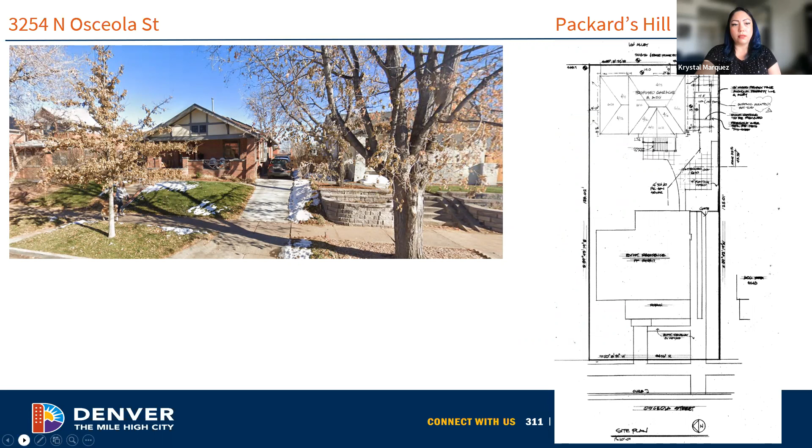Here we can see the proposed ADU garage in context next to adjacent structures. The new garage is still proposed at 24 feet tall, while the primary structure stands at approximately 19 feet 6 inches in height. The secondary structure is set back at the rear of the lot and is approximately 4 feet taller than the primary structure.

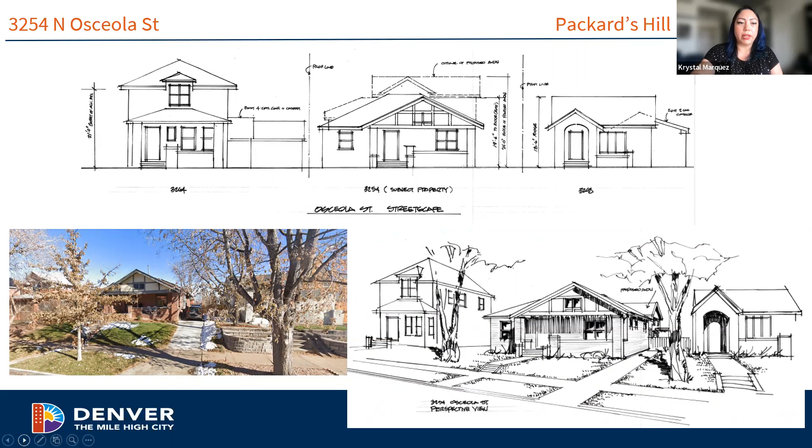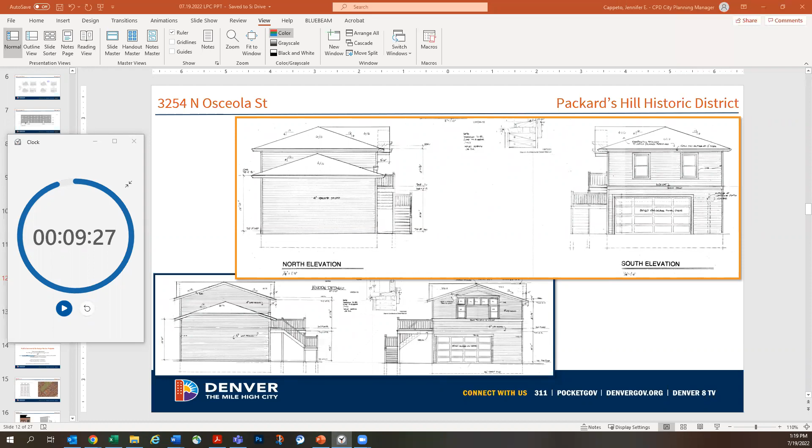Thank you. All right, commissioners, are there any questions for the applicants? No? Well, I think staff said it all then. No questions. All right, well, thank you for your time.

Thank you. Is there anyone on the line who would like to provide a comment on this project? Now's the time to do so. Please use the hand raise button at this time or dial star 9 if you're joining us by phone. I don't see any hands raised, and the person who was on the phone is no longer on the phone, so they must have been here for consent.

Gotcha, okay. If we don't have any public comments on this, we'll move into deliberation. All right, what did everybody think? We've seen this once before.

Any comments? I think the concerns that we had before have been answered quite adequately. It looks like it's much more appropriate with the neighborhood.

So I'll echo that. I think the concern was this one pushed the limits of being almost a standalone single family dwelling, and now it fits that kind of carriage house ADU mode and the guidelines, based on some of that previous deliberation. So I agree, I think it looks good.

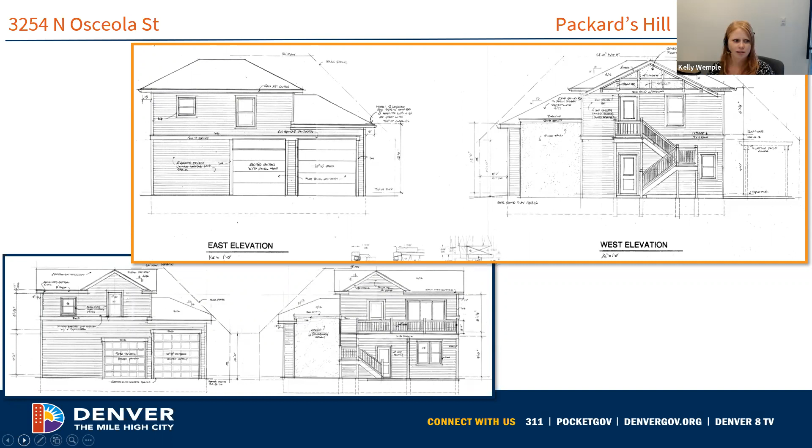I agree. I think we had a big issue with the windows on the south elevation, since that would be the part visible from the street, and it was very atypical of the district. Now that they have those two larger double hungs, it seems to fit much more with the district context.

All right, well, I see nodding heads. So who's going to make the motion? Madam Chair, I can make the motion. Or George, go ahead. Take a shot at this.

Madam Chair, I move to approve application number 2022-COA-307 for the ADU at 3254 Osceola Street, as per presented testimony, submitted documentation, design guidelines 4.3, 4.6, 4.8, and 4.18, presented testimony, submitted documentation, and information provided in the staff report.

Thank you, George. Do we have a second? Madam Chair, I'll second that. Thank you, Julie. All right, I will call for the vote.

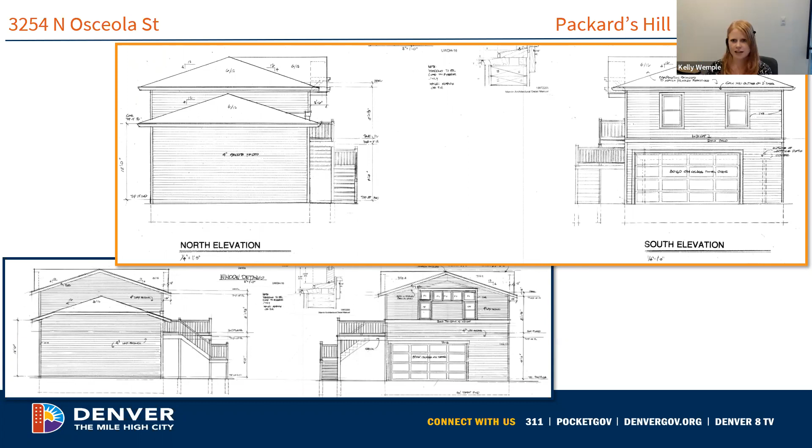George, aye. Aaron, aye. Graham, aye. Julie, aye. Larry, aye. Erica, aye. Anne, aye. And Kelly, aye. All right, the ayes have it. Unanimous vote, and the motion passes. So the project is approved.

Next project on design review today is, let's see, 2022-COA-298 at 3012 Champa Street.

All right, so our next project is a mass form and context review for infill construction at 3012 Champa Street. The lot is part of the Denver Housing Authority's redevelopment of the Platte Valley Homes. The DHA has reconfigured the block, demolishing several buildings and dividing part of this block into new zone lots to be sold off for single family residential development.

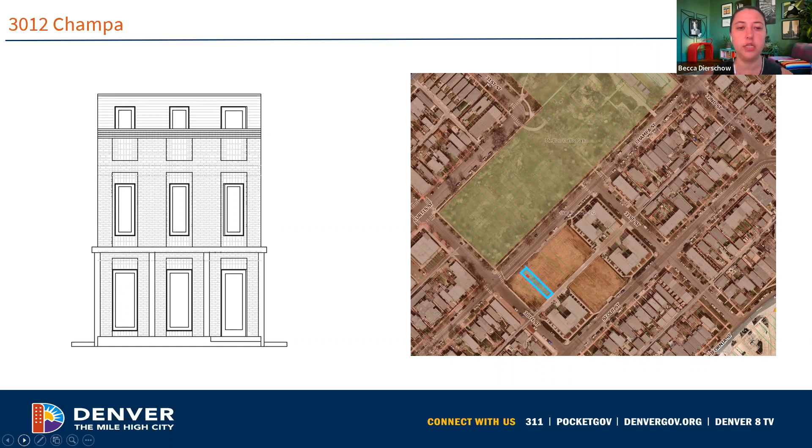The DHA issued an RFP for the development of the lots and encouraged projects that include ADUs to provide extra density, brick as a primary building material, and 20-foot primary front setbacks. There are no historic properties on this block for the applicant to use as a reference, and LPC has reviewed 4 new single-family projects on the Champa side street of the former DHA site.

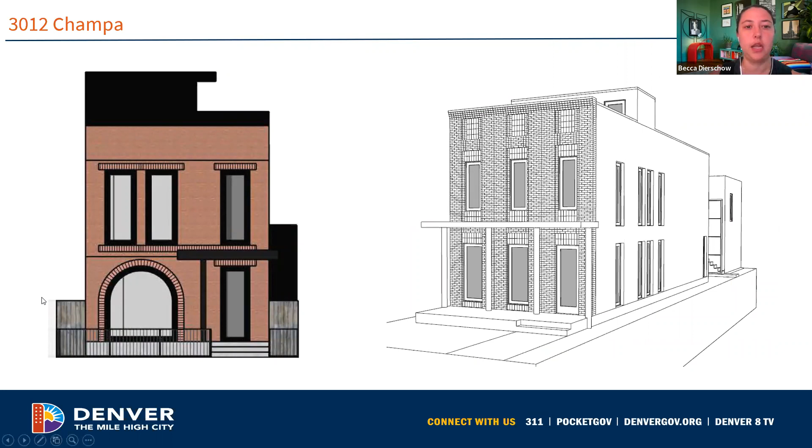LPC previously reviewed a mass form and context submittal for the site, along with the adjacent site at 3022 Champa Street. The commission ultimately denied both of these projects, encouraging the applicant to restudy the solid to void ratio on the front facade, the window proportions on the side elevations, and the porch width.

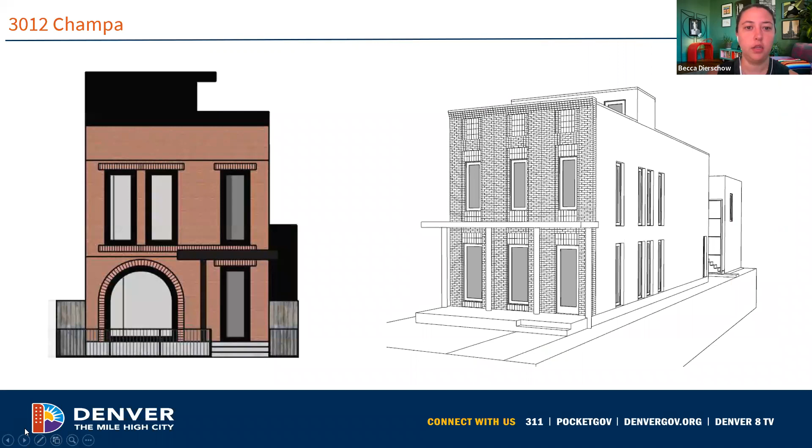So here's a side-by-side comparison of the old design with the new. As you can see, the applicant is proposing to construct a new 2-story single-family residence. The proposed infill construction is an Italianate structure with a full-width front porch and rooftop deck. The secondary ADU is a flat roof form with an exterior staircase.

The staircase has been moved to the interior of the lot based on previous commission discussion, and the ADU garage doors can be accessed via the alley. Based on commission feedback, the applicant has also standardized the side window forms of the primary structure.

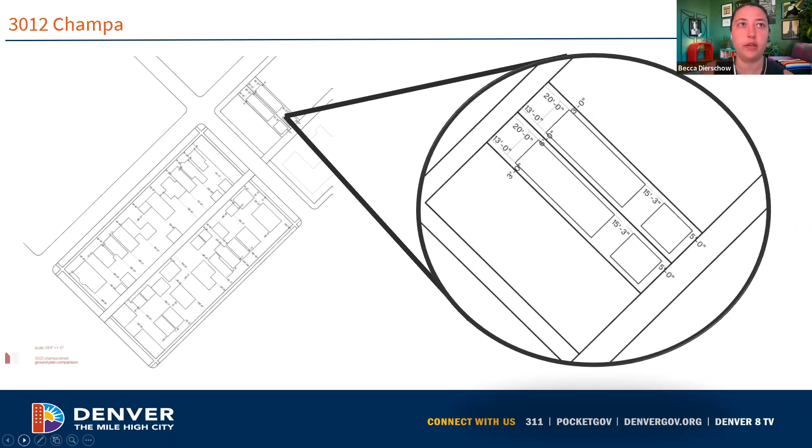The primary structure has a setback of 20 feet, which is in keeping with the standard setback for infill on this block as stated by DHA. The front porch encroaches into the front setback by 7 feet, which is also typical for infill on this block. The primary structure is entirely within the front 65% of the zone lot, while the ADU is located on the rear of the zone lot.

The side interior setback is 3 feet, and the applicant is currently proposing 2 egress wells that encroach into the side setback. These egress wells have been scaled down significantly in this application to comply with zoning standards and based on staff comments.

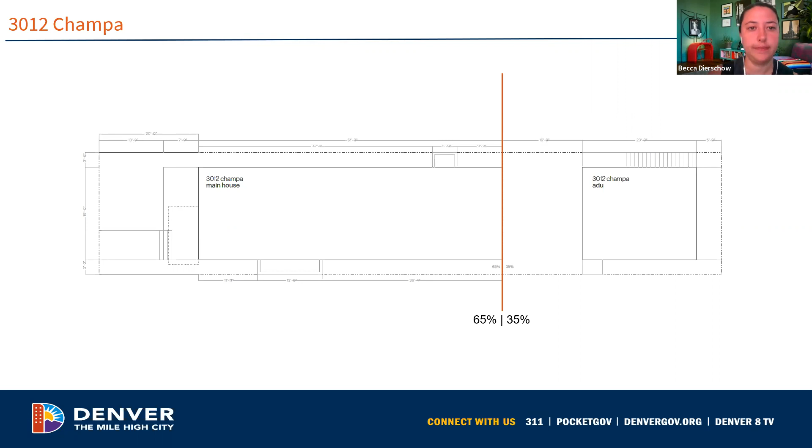Features drawn from Curtis Park's historic Italianate residences include boxy massing and a flat roof, a full width front porch, a decorative cornice, and tall windows. The entrance is offset, a feature found on other Italianate residences within the district. Features that distinguish the infill as new construction include the simplified porch design, simplified cornice and windows, and brick detailing around the windows and in the parapet.

The proposed infill has an overall height of 26 feet, 30 feet when measured to the roof deck stair overrun, which is within the height found within the district and in other homes approved on the DHA site.

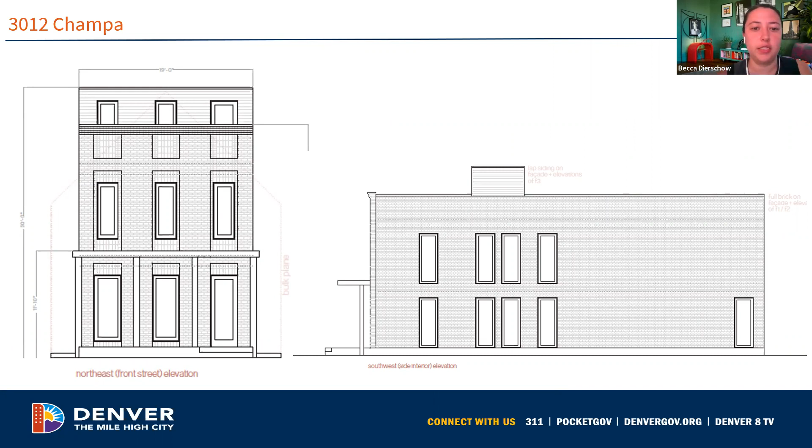I'll quickly show you the other elevations of the structure, which show the tall, narrow windows on the front facade, a simple cornice and the porch. We can see the rear and side elevations with much more regular window patterns, and finally, the ADU elevations.

The proposed ADU carries through some of the design elements from the primary residence, including the flat roof and tall, narrow windows. The exterior stair has been relocated, and the garage portion of the ADU is accessed by the alley, which is found throughout the historic context.

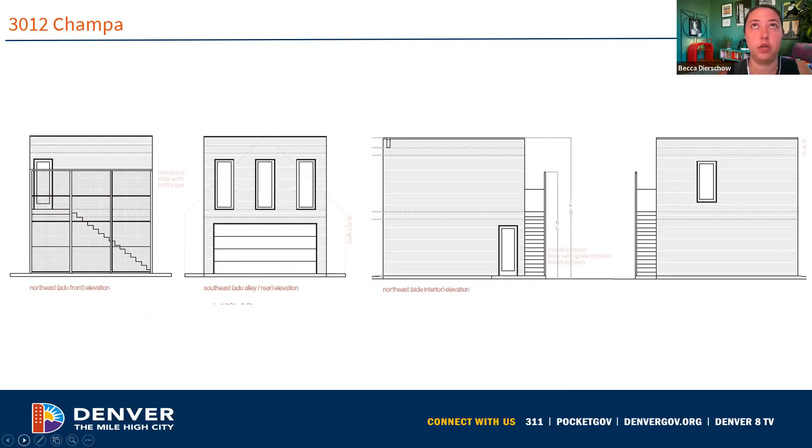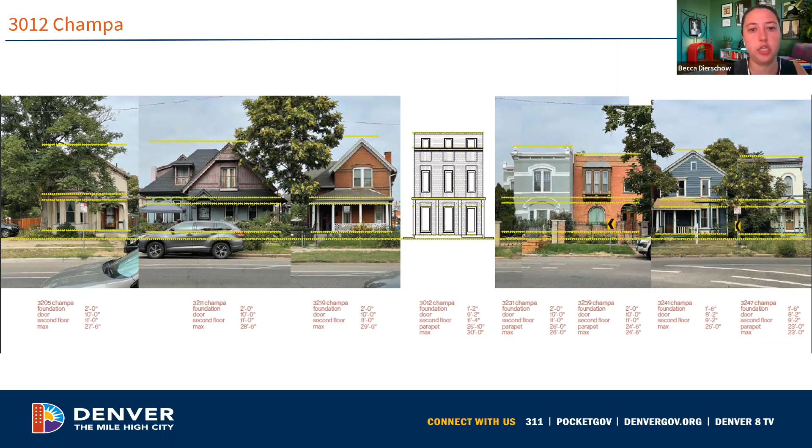In looking at the design of the structure, staff found that the proposed design met the design guidelines for mass forming context. The building maintains the proportions found throughout the historic district, as well as height and setback requirements. The building uses modern details to differentiate the boxy Italianate structure as new construction.

In the previous submittal, the commission had made several comments regarding the building's solid to void ratio, especially around the upper stories and the parapet. The applicant has restudied the front facade, introducing a stronger cornice and adding brick detailing to the parapet to soften that massing. The applicant has also proposed a full width front porch, which is found on other Italianate structures in the surrounding historic context.

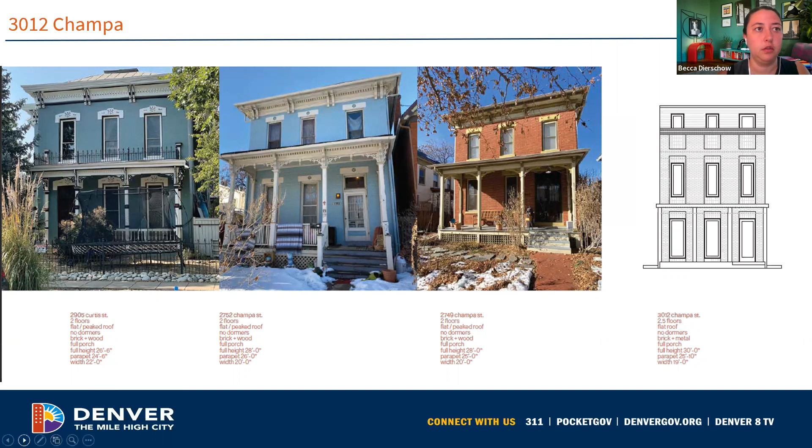The applicant has also spent a lot of time creating a hierarchy of window proportions similar to those found in the historic context. The windows on the first floor are the largest, while the windows on the second floor are narrower and shorter. Finally, at the parapet, a brick detail connects the windows in the rooftop doghouse to the window hierarchy below. The Curtis Park RNO has reviewed this updated design and provided comments in support of the project, and these comments were emailed to the commission on Monday morning.

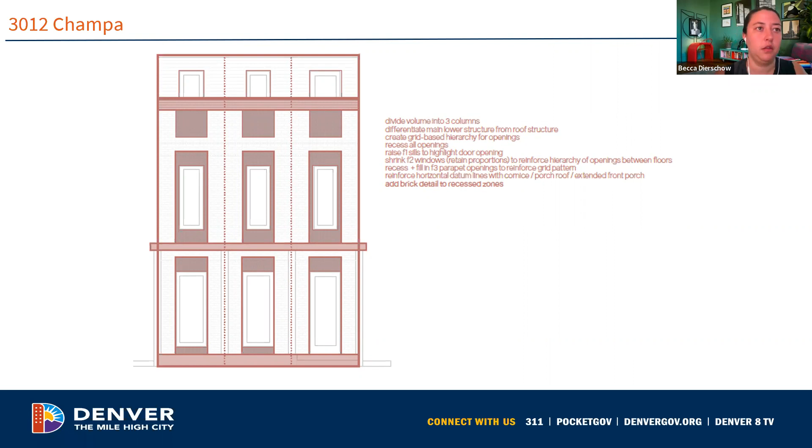Overall, staff feels that the mass, form and context submittal meets the design guidelines. The overall mass and form of the proposed infill are compatible with district forms and is a modern interpretation of the Italianate form, per guidelines 1.1 through 1.4.

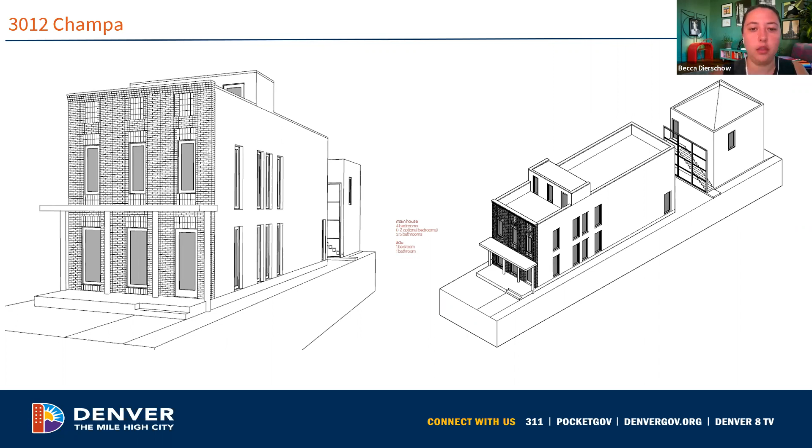The window and porch proportions match the district patterns, guidelines 4.8 and 4.16. The building will be recognizable as current construction, guideline 4.5. And the proposed ADU is compatible with the location, mass, and scale of other secondary structures in the district, guidelines 4.15 through 4.19.

Staff is recommending approval of the project. That was my last line.

Are there any questions for staff?

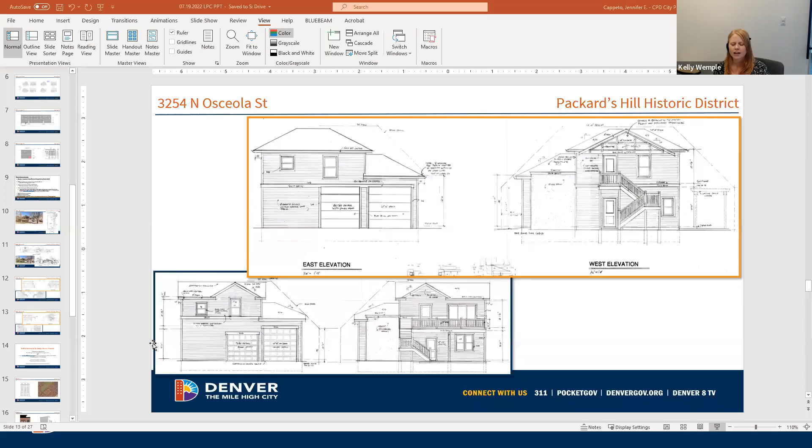Hi, can everybody hear me? Great. My name is Nick Leggett at 2959 Franklin Street.

One thing I wanted to go through is that I really took the last session's comments to heart and redesigned the entire facade to really be based on these great examples of Italianate buildings in the district. Everything is detailed on the front facade down to a brick module, so it's all executable, and those proportions will not change. The one thing I really wanted to talk about is the hierarchy, and how hierarchy is obviously a very important part of this style of architecture.

I really wanted to bring a lot of those hierarchies into this modern building, as that was obviously a comment that was brought up at the last review.

One notable thing is the lower floor windows are larger than the second floor windows. However, that patterning is still echoed in a recessed area that echoes the lower size. I also highlighted the front entrance by adding a soldier course underneath those lower windows, which indicates this is the front door, very common in the district, as most windows don't go all the way to the floor. I wanted to make sure it was very clear from a walk-by view that this was the front door and these were the windows.

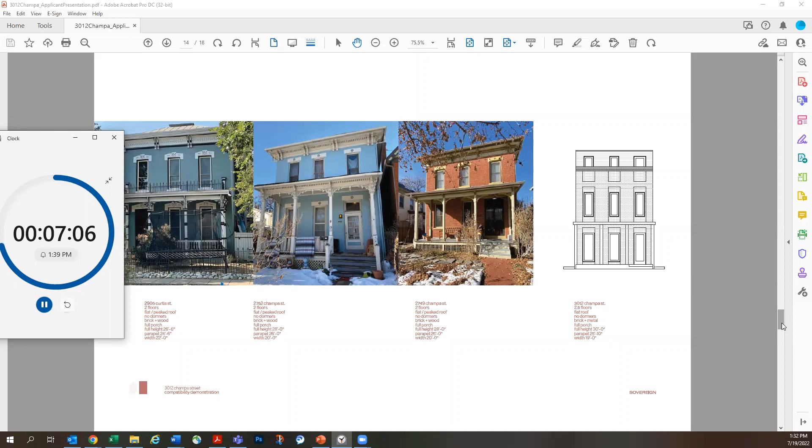I also got a comment on the side windows, that they needed to be a little more regular and grid-based. So I cleaned that up and made all the windows similar sizes, based on a grid module on all faces of the building. Obviously many of them won't be seen by the general public, but I wanted to make sure I addressed that comment.

The other important thing about the doghouse is I wanted to bring it across the entire width of the facade, because I feel that not only in my previous attempt, but in several buildings in the neighborhood, doghouses can cause these elegant, hierarchically designed buildings to feel a little lopsided. So I wanted to bring that doghouse across the whole top, so it really forms almost like a cornice that is held back and addresses the whole form of the building rather than just a way to get out on the roof.

And I think that's all I have. So I'm open for questions.

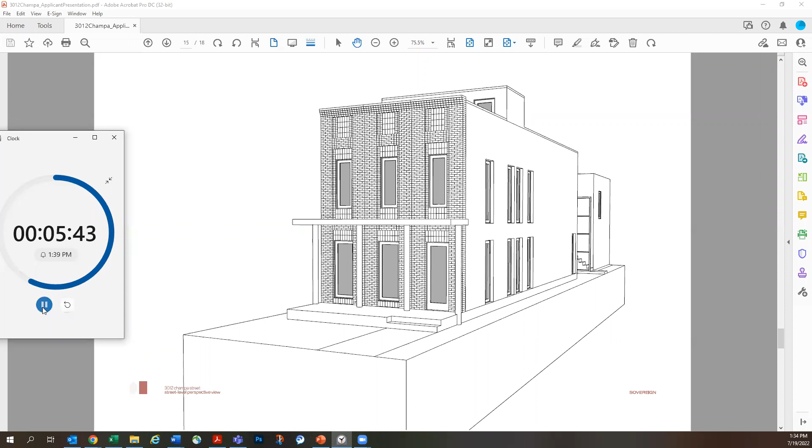All right, thank you. I just want to jump in—Nick, I'm sorry, I just realized I started this on page 14. Do you want to run through any of these at all? I would like to see the hierarchy diagrams, that would be really helpful, because I think that's important to show my process through that. Yeah, am I there yet?

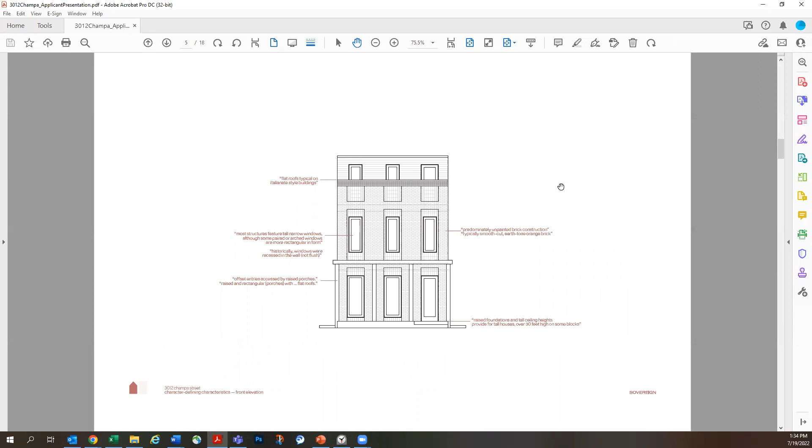Keep going—that one. So this is, and I'm sure you've all seen this since it was in the submitted documents, these Italianate structures can almost be divided into columns and then intensify the hierarchy based on these symmetrical volumes.

If you want to go to the next page—creating a grid-based hierarchy, this grid-based opening system, and the next page. Then all the openings get recessed. I raised the sills of the two lower windows to highlight the door, and I shrunk the second floor windows, keeping their same proportions, but reinforcing the hierarchy of the differences between the two floors.

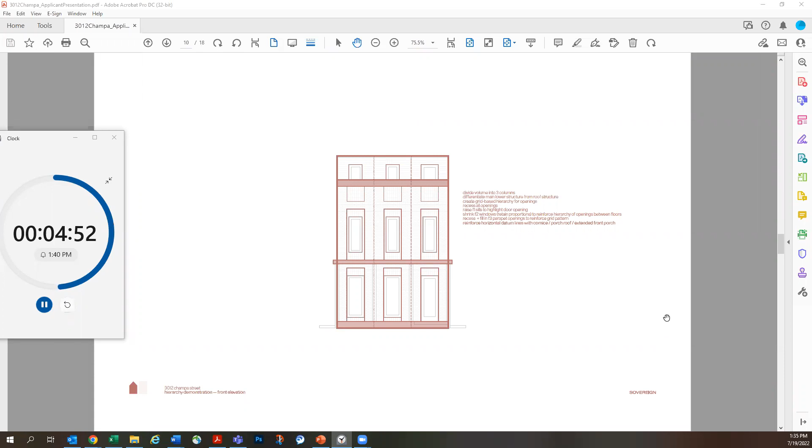The next one: recessing and filling in those parapet grid moments and reinforcing the horizontal datum lines with the cornice, the porch roof, and the extended front porch. Then providing brick detailing to these recessed zones in order to emphasize these shapes and repeat this hierarchy. I think that's all I had.

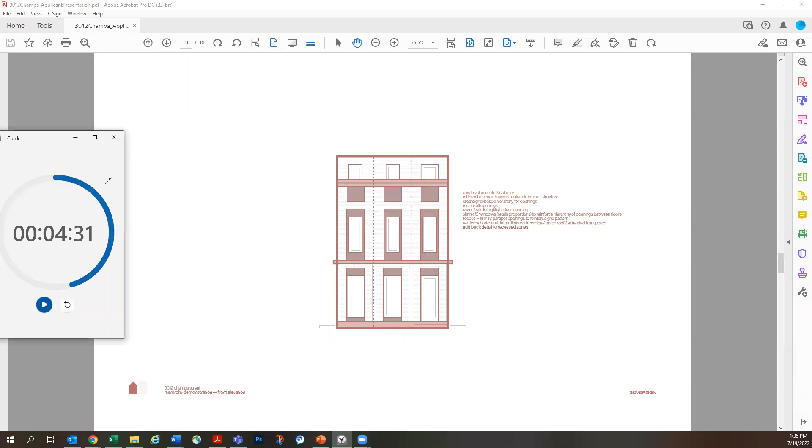Are there any questions for the applicant? I have a question - more out of curiosity, if you could tell me the purpose of that screen on the ADU by the stairs.

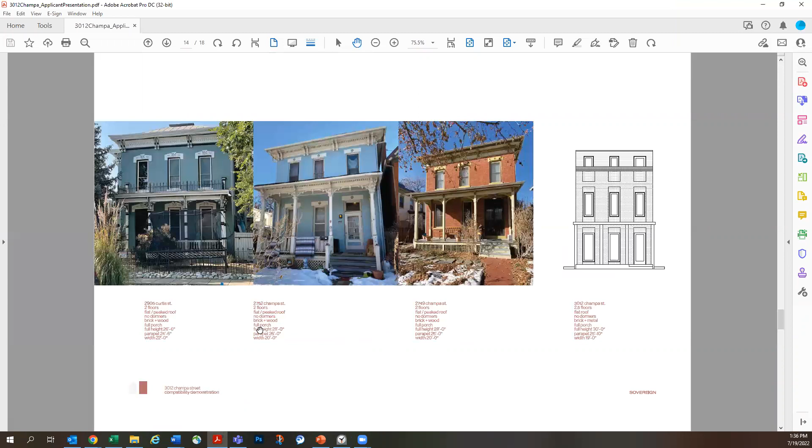That is designed to give some privacy between the ADU and the main house, as there are openings from a bedroom into the backyard and from the living dining space into the backyard, in case somebody wanted to use that as an office or for family coming to stay. The point of it is this product called green screen.

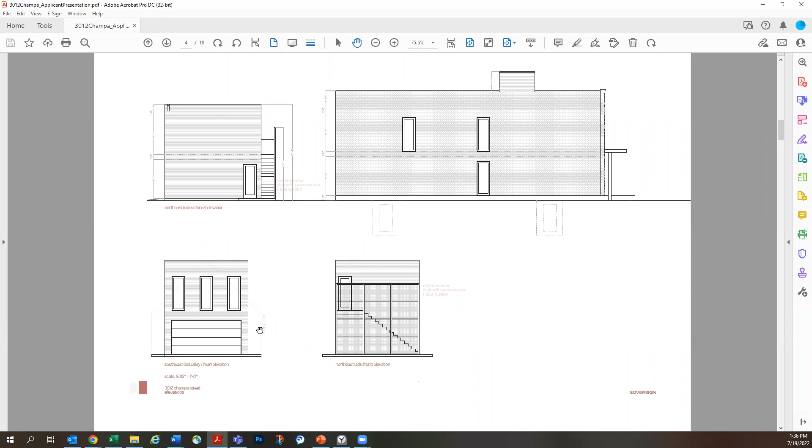It's an expanded metal mesh, and it would be planted. I tend to overplant things to make sure they happen, overplanted with something so it basically becomes a green wall facing the house - that's what I was envisioning. So just select your plants carefully. Yes, I have been trialing many things in various projects lately, so I hopefully can make it work.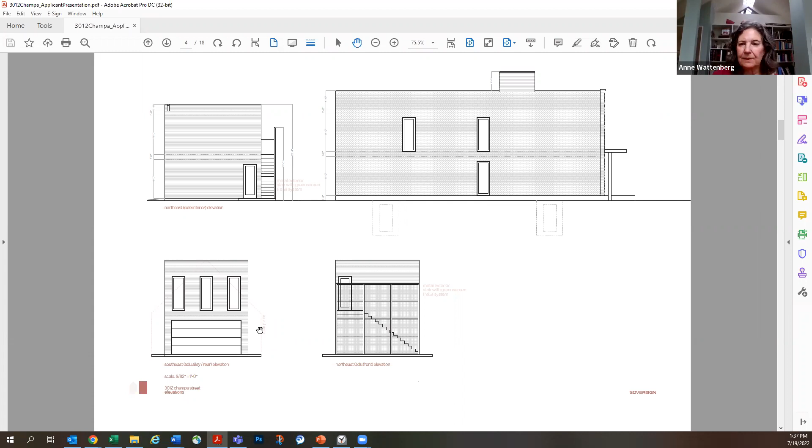Great, any other questions for the applicant? Yeah, Anne - I have a question, and I know we're in mass form and context, and I understand that the entire main dwelling is clad in brick, but on the side elevation there's a line that's shown.

And I know I'm jumping the gun because we're in mass form and context, and this is really a detail question, but I'm just kind of curious what it is.

That's a detail I haven't exactly worked out yet. I was envisioning that we would highly detail this facade and there would be a seam, a line. However, as I've been thinking about it after I sent in the application, I think it would just be meshed into the rest of the brick on the side, so there would not be a joint. So these drawings are about a week outdated in my head - I think it would actually be a very common standard corner joint on the brick there.

Thank you. Sure, any other questions? Larry. Yeah, I was wondering if you could talk about the setback columns on the front porch, just the thoughts behind that.

I really wanted to play with it, because I think in this architecture, in this Italianate style, specifically in Curtis Park, all of those posts are pushed so far forward. I wanted to play with the balance of how that porch roof worked, and create a little more opening to the sidewalk rather than it being this closed off wall.

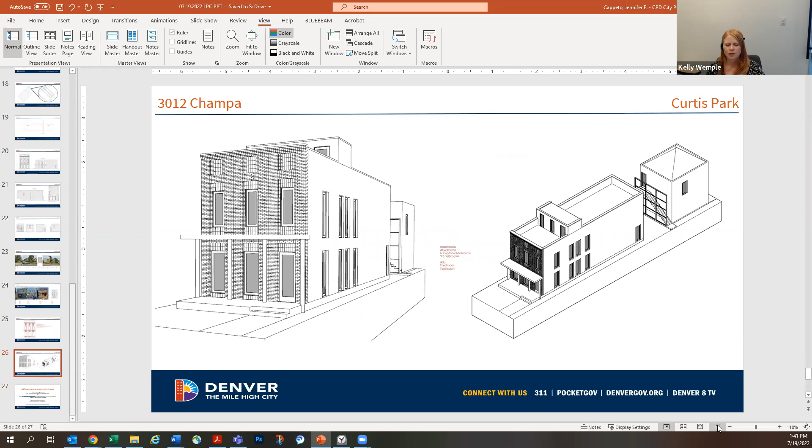What did everybody think about the project, in reference to the design guidelines? Maybe let's start with the windows, since that was just brought up in the public comment we got from Keith. Did anyone have any concerns about the proportions of the windows?

Madam Chair, I'll jump in. I think I'm generally in agreement with the staff report, and the word 'relatively consistent' was used in response to guideline 4.8. I think the rhythm and balance we see in this submittal fits much better with the context than I recall in the earlier massing proposal we looked at. So I agree with staff's assessment there, especially as a new infill property. Thanks, Graham.

Go ahead, Anne. I question a little bit guideline 4.3 with respect to the door looking exactly like the windows, because I'm not really sure that fits the pattern. Usually I think the sill of the windows, whereas the width is the same, the sill of the windows is generally higher than the sill of the door.

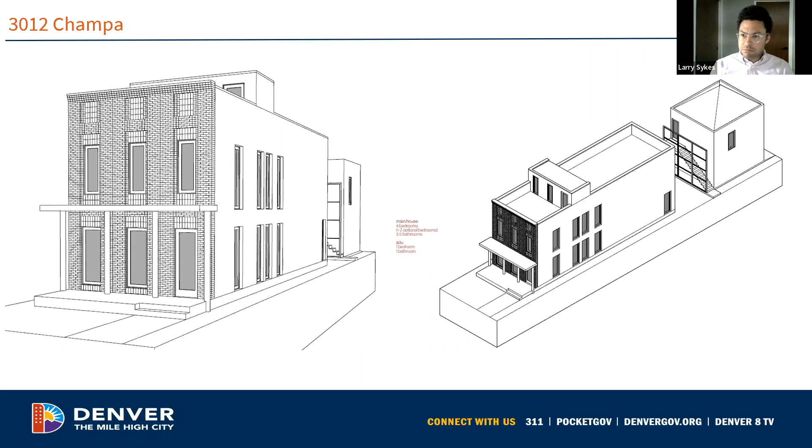Yeah, Larry. Yeah, I just wanted to echo Aaron and Kelly's comments, and I agree with the staff report. I don't feel that the window proportions are bothersome in the context of this being a contemporary interpretation of Italianate. And also, to reference my earlier question to the applicant about the setback columns, I actually think that is also part of the exciting and maybe subtly intriguing interpretation of this historic context. So yeah, I'm happy to support this as presented.

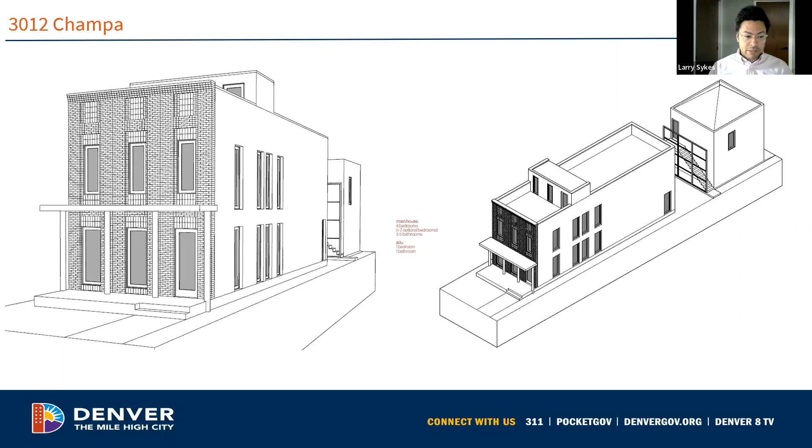Great, and good point, pointing out the porch, Larry, I agree with you. I think that's a pretty exciting contemporary interpretation. They've followed the proportion of a full length porch like a lot of the Italianates have, but kind of played with where the support is. It's kind of cool.

Any other, so we talked a lot about the windows, there's discussion on the porch, anything else? If not, would someone like to make a motion?

I'll do it. Madam Chair, I move to approve application number 2022-COA-298 for the mass form and context at 3012 Champa, as per design guidelines 4.1 through 4.5, 4.7, 4.8, 4.15 through 4.19, character defining features for the Curtis Park Historic District, presented testimony, submitted documentation, and information provided in the staff report. Thank you, Aaron.

Do we have a second? Second. Thank you, George. All right, if there's no further discussion on the motion, I'll call for a vote. George, aye. Aaron, aye. Graham, aye. Julie, aye. Larry, aye. Erica, aye. Anne, aye. Kelly, aye. All right, we have a unanimous vote, so the motion passes and the mass form and context is approved.